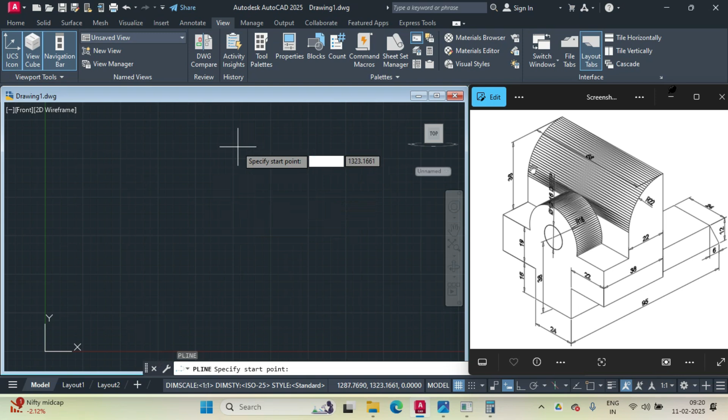So first we'll change the view to the front view. Now we are in the front view. Now once we are in the front view, we'll use the polyline command. So we type PL for polyline and we hit enter. Then it asks us for the start point. We click on this point. We turn the ortho on and we give a distance of 22 units.

Then we have to give a distance down, and this distance should be 19 plus 36. So we'll use the calculator and we'll type 19 plus 36, and that is 55 units. So we'll come here and we'll give a distance of 55 units. Then we'll extend it to the left 38 units. Then we'll extend it up

19 units. Then we'll take help of the tracking feature. So ensure that your tracking and snapping is on. Then we take help of the tracking feature and click over here and press C to join with the start point, and our first profile is ready. This one. Now we have to fillet this to a radius of 22.

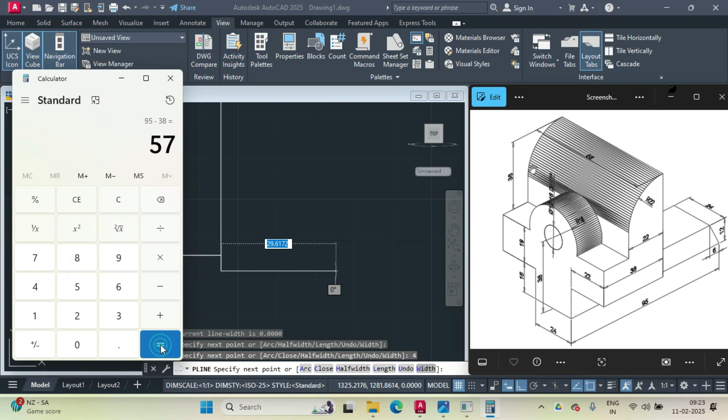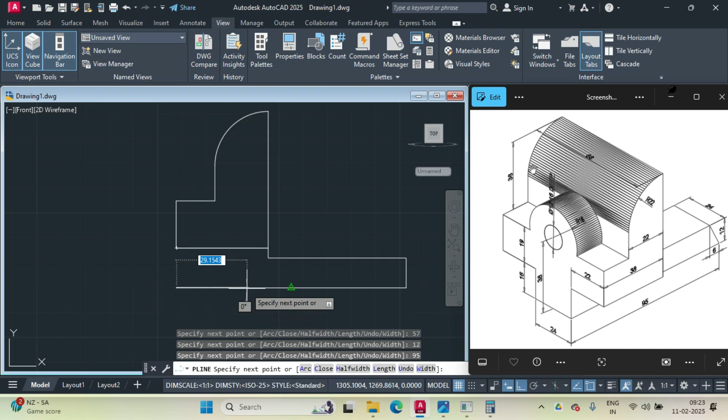4 units. Now we have to extend to the right, and the right distance would be 95 minus 38. So again we use the calculator and we say 95 minus 38 equals 57. So we give the distance as 57. Then we move it down with a distance of 12 units. Then to the left 95 units, and then C for close. And our lower profile is also ready.

Now we have to chamfer this. So we type chamfer and then we give D for distance. So the first line distance is 12 and the second line distance is 6. This is the first line and this is the second line, and now it is properly chamfered.

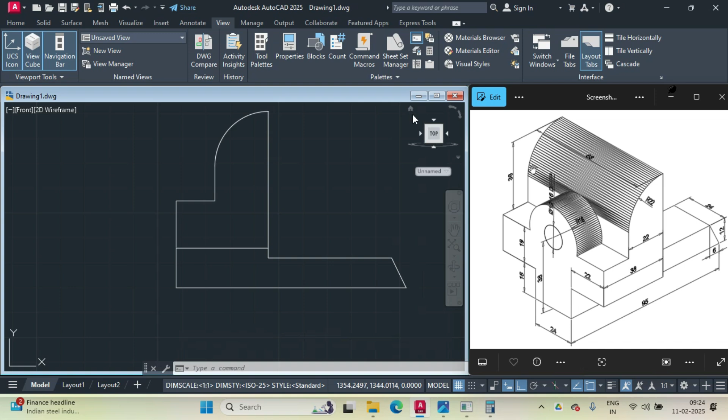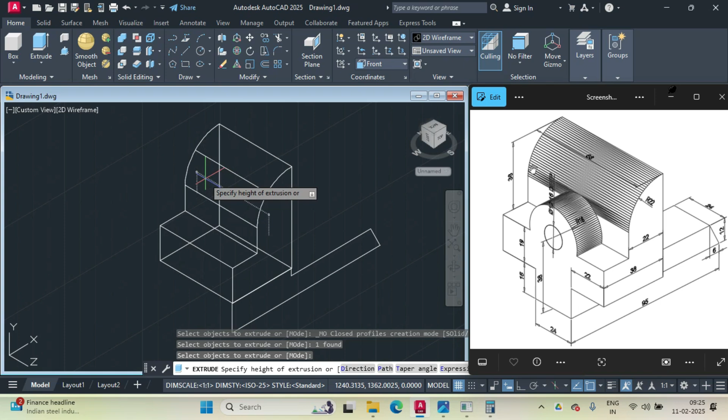Now we go into the isometric view and now we'll begin the extrusion. So we go into the home and we select extrude, and then we click on the surface to extrude and we press enter, and we extrude this to a thickness of 68 units, and from here we change to shades of gray.

Now we'll extrude this lower object. So again extrude, select the lower object, press enter, and the extrusion is 24 units. Press enter. Now we have to move this. So we type move, select the object to move. This is the object. Press enter.

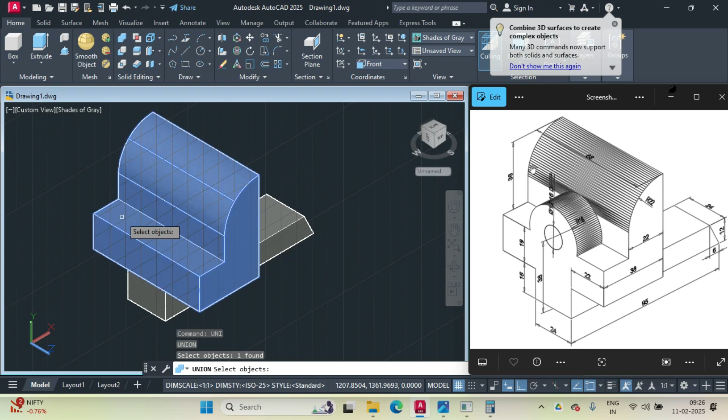Base point, you say midpoint of this, and where you want to move it to, midpoint of this. So the object has got moved. Now we have to draw the circle on the top. So what we'll do is we will first union these two objects. So we'll type the union command and select the objects to union, this and this, press enter.

Now it's become one. Now we'll draw this bigger circle of radius 16. So we'll select circle and we'll select center radius. Center point is this and radius is 16. Press enter. Now we'll move it up. So we type move. Select the object to move. This is our object.

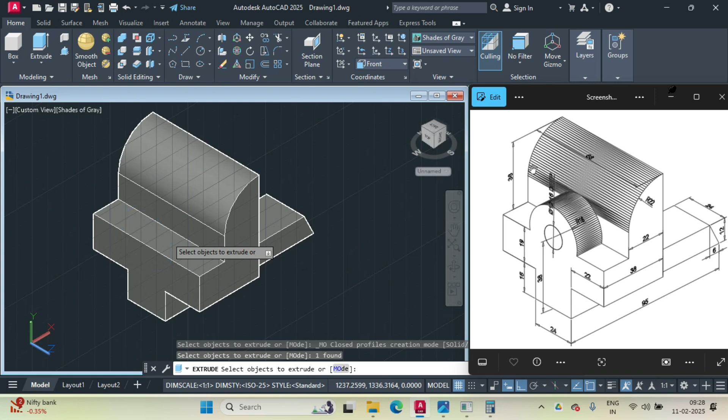Select the base point. So first ensure that you select the correct base point, and where you want to move it, we want to move it to a distance of 38 units. So we type 38. Now we have to extrude this to a thickness of 38. So we select extrude, select the object to extrude and extrude it inside to a distance of 38 units.

Now let us union these objects. So we type union and select this, and press enter. Then we draw one circle with center diameter, and center point is, we'll type CEN of this, and the diameter would be 12 units.

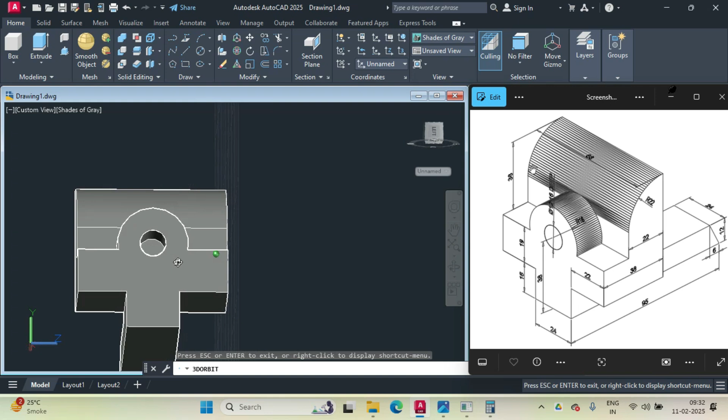And then we use press pull, click only on the circle, nothing else. So press pull and click on the circle and pull it inwards to a thickness of 16 units. Press enter. And now our geometry is complete. You can see it in all possible directions to get a complete view of your objects.

And then you can finally use the union command to combine all the objects and press enter. And now our geometry is complete. So friends, in this tutorial we have seen how to make this geometry in AutoCAD. Hope you have learned something new.